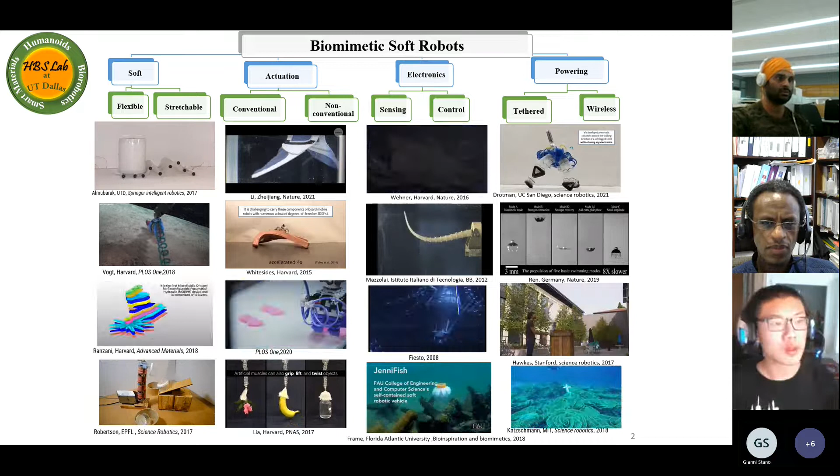So why do we do research on biomimetic soft robots? The major fundamental areas of working are basically these robots are soft. They use both conventional and non-conventional actuation. They can be used for sensing and control in various different applications, plus the powering aspect of these robots. So these are the fundamental areas of working of soft robotics.

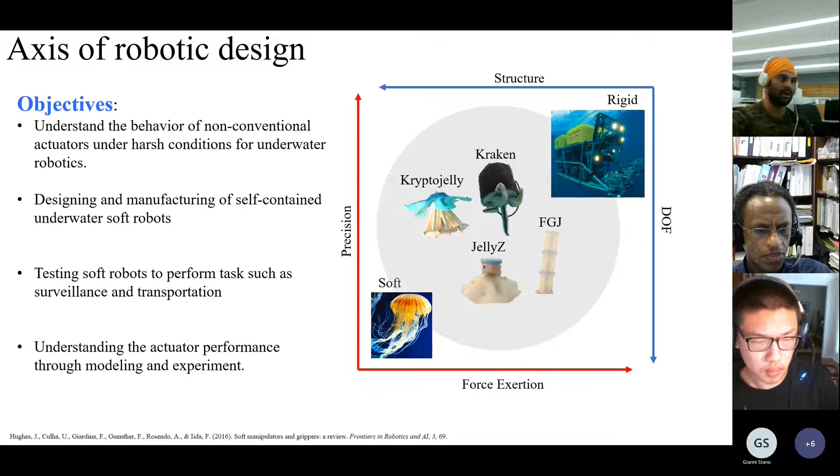Now, what are the major objectives to make a robotic design? Why are we making a soft robot? Basically, we are making a soft robot to understand the behavior of non-conventional actuators under various conditions in water. We are designing and manufacturing self-contained underwater soft robots. We are testing these soft robots to perform different tasks such as surveillance and transportation, and we are also trying to understand the different non-conventional muscles, the actuators, by doing modeling and experimental tests.

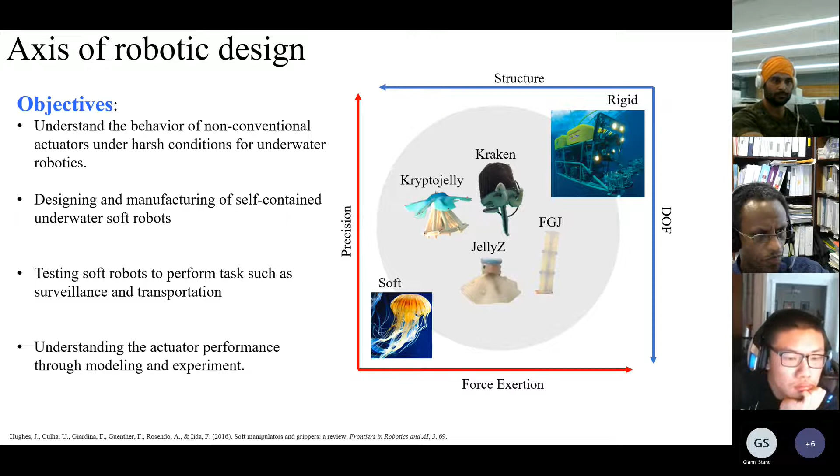The major areas of work that I have been doing over the past year are shown in this slide. So in the underwater soft robotics domain, the first robot I'm working on was the 3D printed Jellyfish Robot. This was a project sponsored by the ONR. The ultimate goal of this was to make controllable geometry of an underwater soft robot, basically to make it manufacturable and to utilize a swarm of these robots.

Number two was the battery powered jellyfish. There is a problem in underwater soft robots in that most of them use wires to get power, or different methods, but none can say that they can be powered on their own wirelessly. This is the purpose of using the battery powered Jellyfish, where I'm trying to use the wireless communication system plus the artificial muscles to actuate the robot with the battery inside the robot. Number three is the hydrogen powered Jellyfish, which is a pneumatically actuated Jellyfish to make it cheaper.

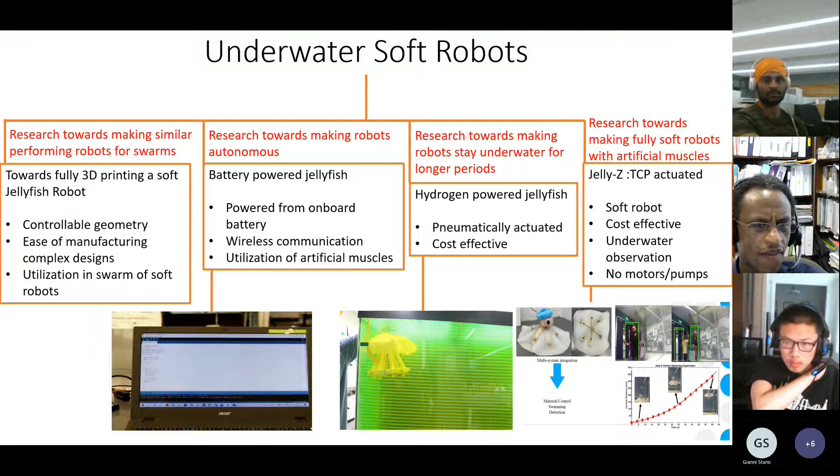Now, why do we use the artificial muscles? The artificial muscles are used in response to changes in the environment. They are used to control. We can control the level of stroke of these muscles by changing the length of the fiber, by treatment in the atmosphere where we provide heat, and we also change the frequency of the actuation. We can also control the number of plies to actually increase the amount of load that these muscles can take.

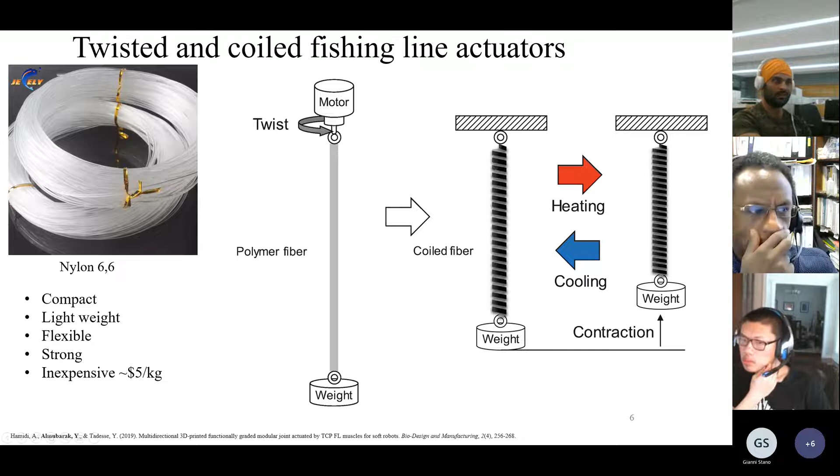Moving on, we are working on some fishing line muscles. These are both self-coiled and mandrel coiled. Right now we are working on mandrel coil muscles, which we are using in the soft robotic skin, and we are seeing the performance of these muscles is comparable with the shape memory alloy coils. These are compact, lightweight, flexible, and strong.

Here in this slide, I'm showing the fabrication process of these muscles. Step one is twisting. Number two is putting nichrome. Number three is coiling. On the right hand side, you can see different photographs of these muscles when loaded and not loaded.

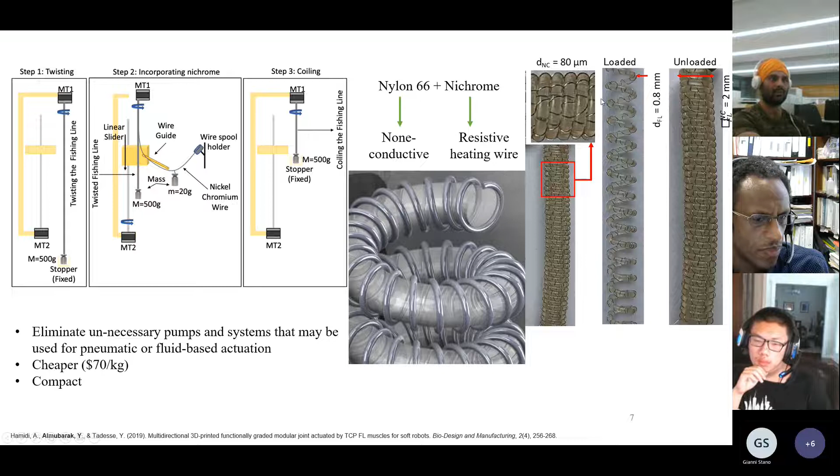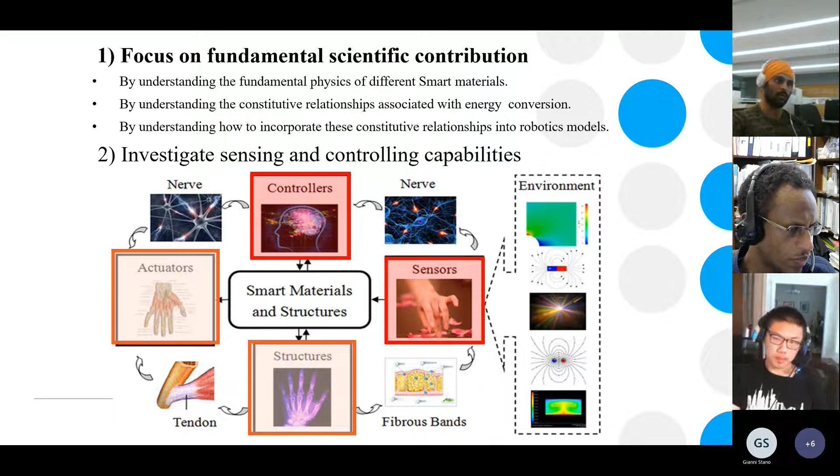The focus of the fundamental scientific contribution is understanding the fundamental physics of smart materials, understanding the constitutive relationships, and how to incorporate these constitutive relationships into the robotics model. My major area of work in my PhD is to investigate all these aspects and to make a totally sensing and totally controllable underwater soft robot with soft artificial muscles.

What is my ultimate goal? My ultimate goal is to make an autonomous smart robot that can go underwater, which is soft, and which can explore various depths inside oceans and seas. As we all know, oceans and seas are not being totally explored, so these soft robots will help in future to go deeper down the oceans and explore various things.

So far this is my second year of PhD. These are the papers which have been accepted, submitted, and which I'm currently working on. That's all from my side. Thank you, and I would like to thank Dr. Ray Baughman, Dr. Jack Costello, Dr. Yonas, who is my guide and PhD supervisor, and Dr. Sean Collins. Thank you.

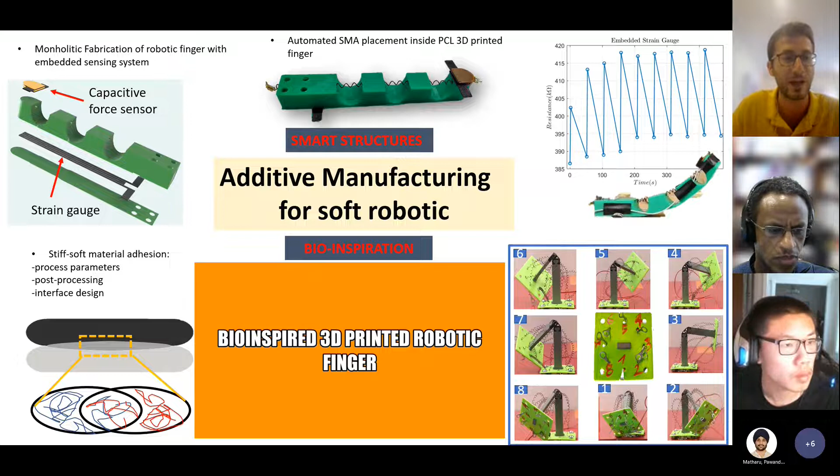Another pillar of soft robotics is bio-inspiration. Just take a look at our body - we have stiff materials like bones connected to each other by soft matter, like cartilage. So we use the same manufacturing technology, FDM, to create this kind of bio-inspired structure by extruding a very stiff material and an extremely soft material at the same time. This is a very new and challenging topic that can potentially push the role of additive manufacturing a lot in the soft robotic field.

We studied how process parameters, post-processing, and design interface can give us benefits for the stiff-soft material adhesion, and we came up with the optimal configuration. We also fabricated a couple of bio-inspired structures.

Now I'm playing the video. It's gonna start soon, I hope.

Yes, this is one of the bio-inspired structures we fabricated. It's a finger, and the gray part is a very stiff material, while the black joint is made of an extremely soft material, with the shape memory alloy inside. Now you can see when we activate the shape memory alloy, we get a very fast response of the finger. If you try to bend your finger right now, you'll see you get almost the same bending that we got using the 3D printed finger.

We also 3D printed another structure that we call the 3D printed bender. It's literally a structure with a soft joint and eight shape memory alloys surrounding the structure. As a function of which shape memory alloy we activated, we got different bending motions.

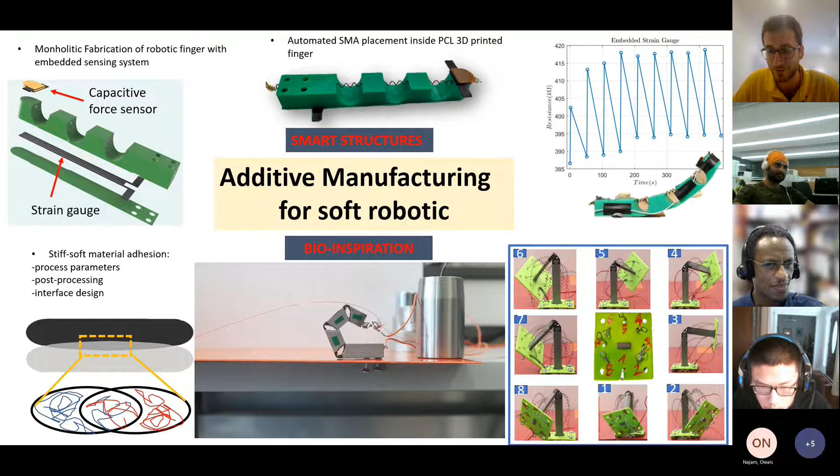So Gianni, I have a question - what's your future research area? Once you have the experience now of doing work in the lab, what's your future research goal? It's a good question - I'm going to finish my PhD in November, so I think I'll mostly focus on writing my PhD thesis right now. When I get back to Italy, I'll focus on that. But I'd like to keep working on this kind of stuff - additive manufacturing of sensors, embedding actuators and actuation systems inside soft structures. So yeah.

Nice man, thank you. All the best to you. Thank you, Wandi. Thank you.

So Gianni, while the slides are here - I think the problem of manufacturing sensors, actuators, the passive structure, wiring, everything is very complex. So to make a smart structure, including in the future controllers and circuit diagrams, everything is a big area of challenge for everyone, and there's no perfect solution so far. The capacitive sensor on the left, you also have the strain gauge for the flex sensor, the touch, and the entire passive structure.

So now my question is, how small, using the additive manufacturing with the FFF, how small can we make this? This kind of printing, this is a good potential question.

Yeah, this is a good question. I think if you want to have good feedback from the sensors, for example a strain gauge, it's not supposed to be less than maybe 3 centimeters in length just because it's fabricated with additive manufacturing. Yeah, the scalability is a little bit of a problem for FDM, for FFF fabrication, especially when you want to fabricate very small structures.

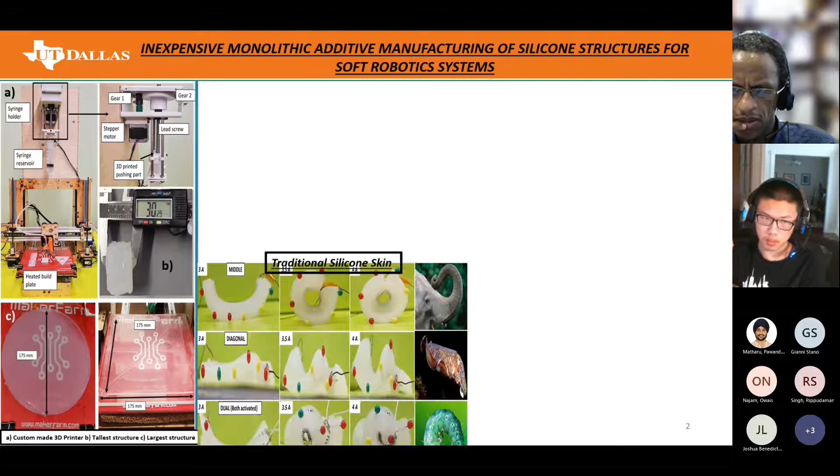Finally, the proposed custom-made 3D printer was used to manufacture multiple types of silicone skin with embedded shape memory alloy actuator. This work has been done in a single manufacturing step, autonomously, without any kind of human direct intervention, using a pick and place robot to embed the SMA. Two types of silicon skin have been manufactured: one is traditional silicon skin, which doesn't have any pattern, and three types of patterned silicon skin have been printed - one with SMA in the middle, one with SMA in the diagonal, another with SMA dually placed.

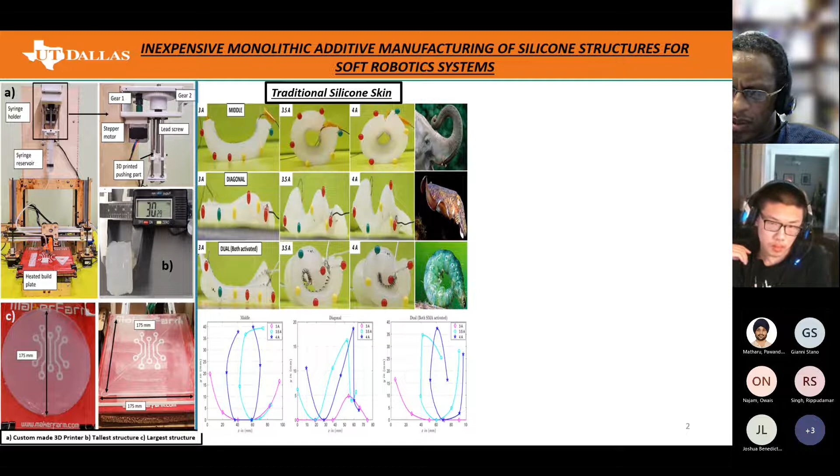This silicone skin, after embedding is done, is characterized using power supply, and at the time they are tested at different current inputs. This skin demonstrates complex motion that recalls the behavior of several animals, including an elephant trunk, a cuttlefish, and a caterpillar. These are the MATLAB plots of this skin movement.

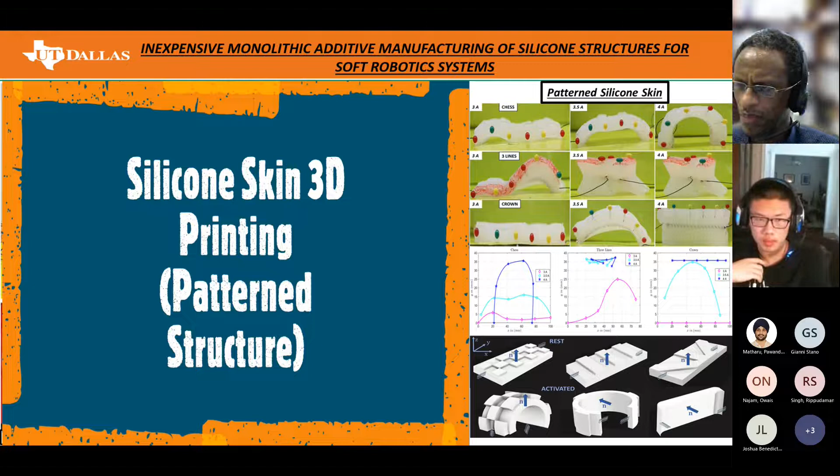And now I am going to talk about another type of silicone skin which has been manufactured and patterned. This is patterned silicon skin - three types of patterned silicon skin have been printed here: one is chess, another is three line, another is crown. Different structures show different kinds of motion as shown in the figure.

These are the MATLAB plots of the silicon skin movement, which has been done using the tracker software. The patterned structure demonstrated unique behavior, and the most important significant thing here is they show out of plane deformation.

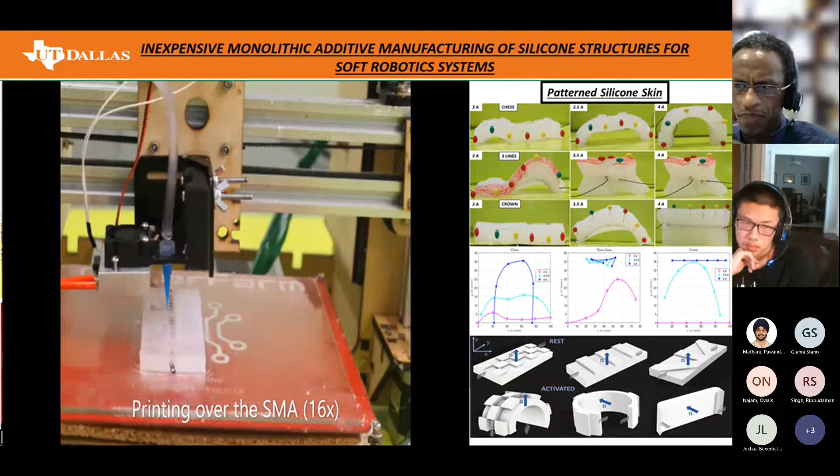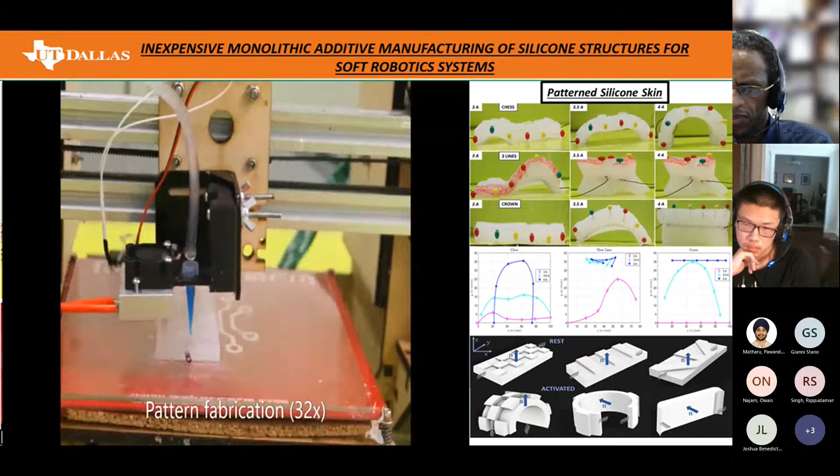The achieved results demonstrate how soft robotics can benefit from silicone-based material extrusion, combined with a pick and place robot. Numerous interesting applications are possible with the proposed 3D printed artificial skin, including soft grippers, walking robots, a soft robot carrying objects, and jumping robots. This video shows the manufacturing process of the silicone skin printing, and here we show the out of plane deformation of some of the silicone skin.

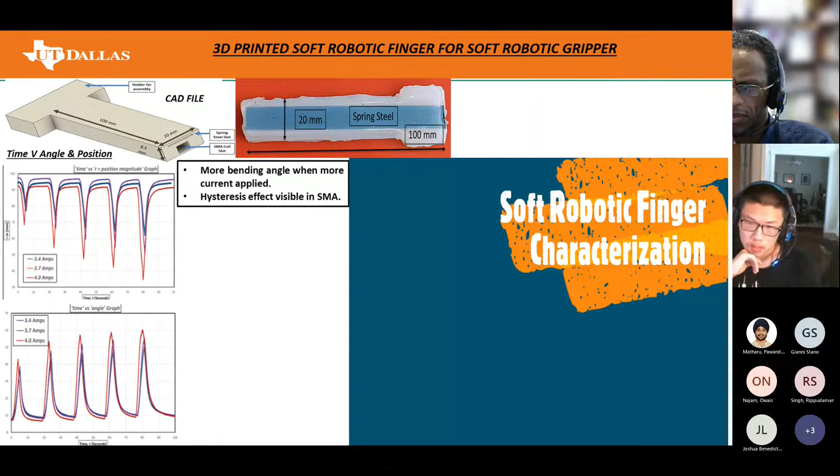Now I am going to talk about 3D printed soft robotic finger for soft robotic gripper. This is the CAD file for the soft robotic finger, which includes the holder for gripper assembly, slot for SMA spring as actuator, and also slot for spring steel to give the finger enough solidity so that after actuation it comes back to its initial shape. Here is a picture of the actual 3D printed soft robotic finger with embedded actuator and spring steel.

After printing several fingers, this is characterized using the power supply with different current outputs. Current used in this research ranged from 3.4 ampere to 4 ampere. Current applied for 3 seconds, then there is a 15-second gap for the finger to go back to initial shape. The study has been done for 5 cycles, which you can see in the video.

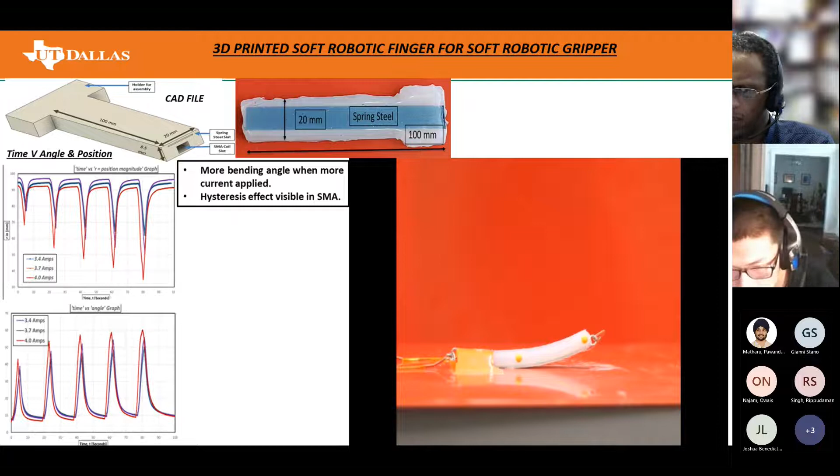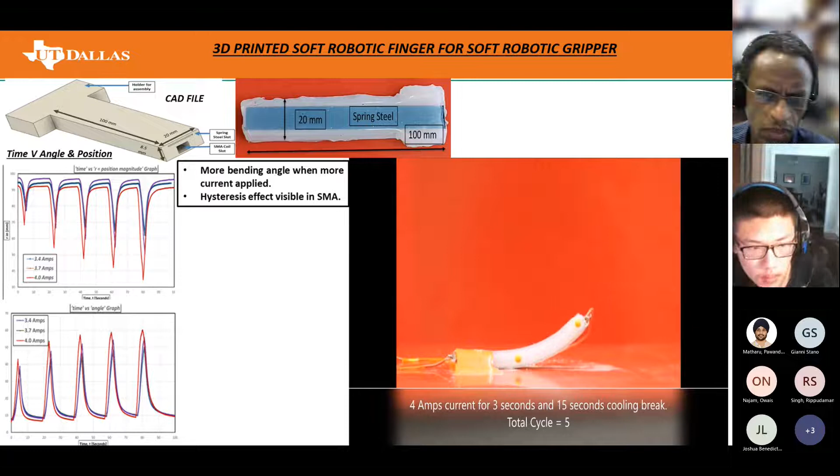It has been found that when the current is higher, the bending angle is more. At 4 ampere, it reaches 60 degrees, and at 3.4 ampere, it reaches 50-degree bending angle. Hysteresis effect is also visible in these fingers. This video shows the characterization process.

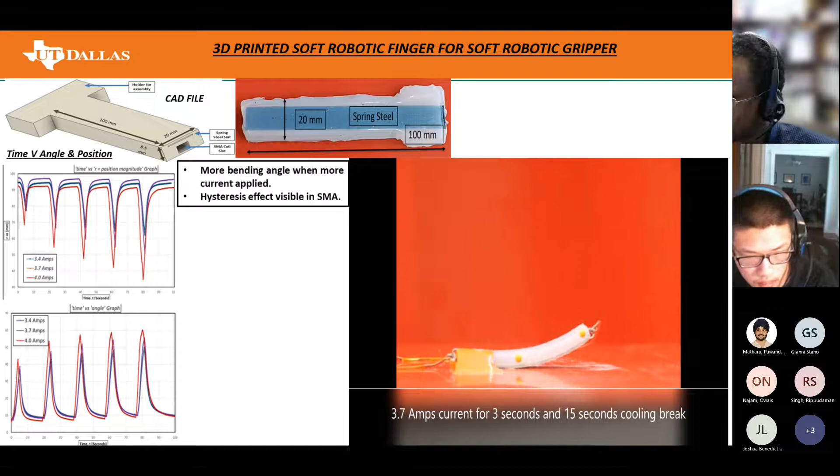It has been found that the bending angle is far superior for the human-like finger. For the human-like finger, the bending angle is 92 degrees, which is 35 degrees more than the finger without joint, which is very significant. Due to the human-like joint in the finger, we achieved these results. Although this kind of finger is very complex to 3D print and almost impossible to mold, by printing the finger with a joint we can achieve more bending angle and more stiffness, which is more suitable for a soft robotic gripper to hold heavy, bigger, and complicated objects.

Thank you everyone. Gianni assisted me in these projects, and I have also worked with Gianni on FDM printing projects, and Gianni will present about that interesting work.

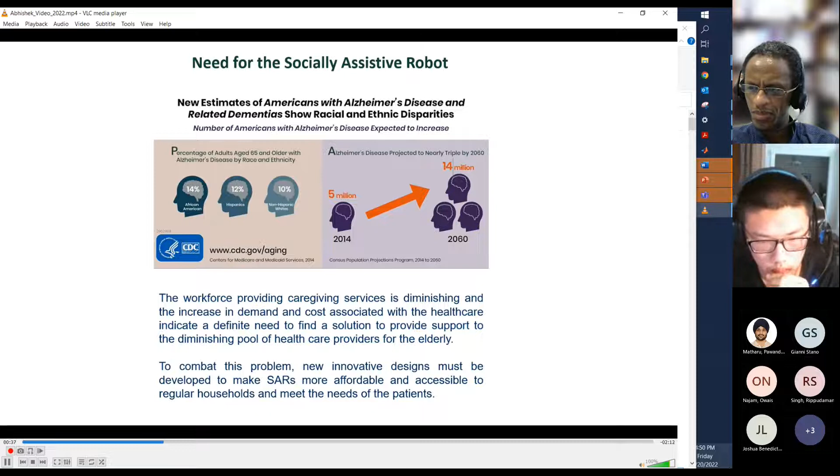According to CDC data, the number of people suffering from Alzheimer's disease will nearly triple by 2060. So developing socially assistive robots for this purpose is really active, and that's where my focus is right now.

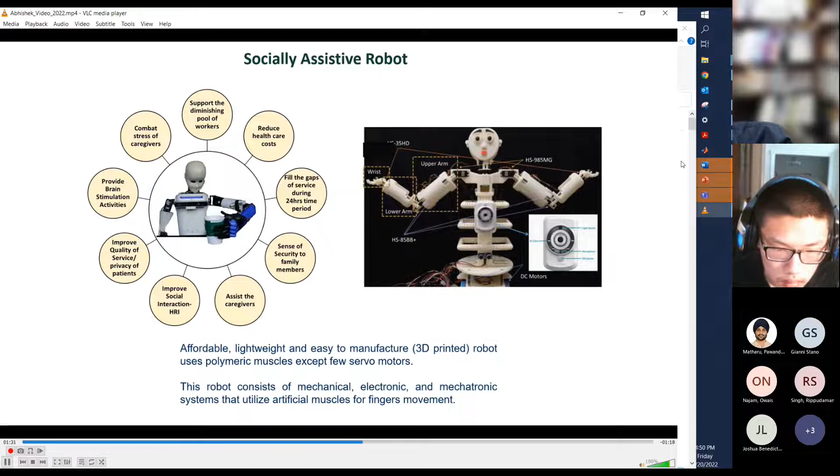For finger actuation, TCP actuators and SMA actuators are some examples of artificial muscles. They don't take too much space, and the operating mechanism is also simple because they are less bulky and easy to operate. Many different kinds of complex motions can be achieved from the fingers with the help of these artificial muscles.

The goal of this project is to eventually support cognitive functions and provide emotional support to patients, as well as enhance security and safety by detecting falls and alerting authorities and family members in emergencies, with improved interaction and friendly appearance. All of this can be achieved with the help of Internet of Things, integrating different devices, incorporation of artificial intelligence, and installing a mobile base to provide more autonomous capabilities to the humanoid robot and increase its functionalities. That's all for my presentation.

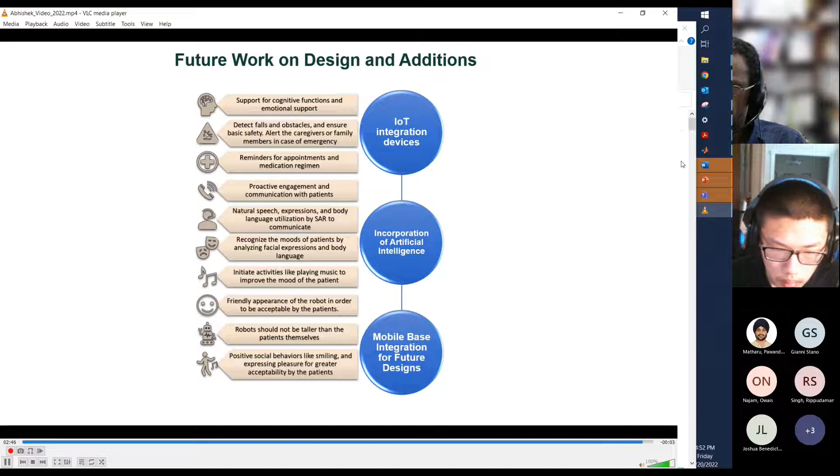Hello, I'm Shubhankar Kasle. I'm a master's student at the Engineering Department at UD. I'm currently working under Dr. Yonas Tadesse on the Fludo-jelly project.

So to start with, what is Fludo-jelly? As the name suggests, it's a biomimicry of a jellyfish. Similar to the working of a jellyfish, which jets out water by movement of its legs to achieve motion, the Fludo-jelly uses the same principle of jetting out water using the movement of its legs to create motion. The Fludo-jelly is a soft actuator robot which is pneumatically actuated and controlled using solenoid valves and remote control circuits.

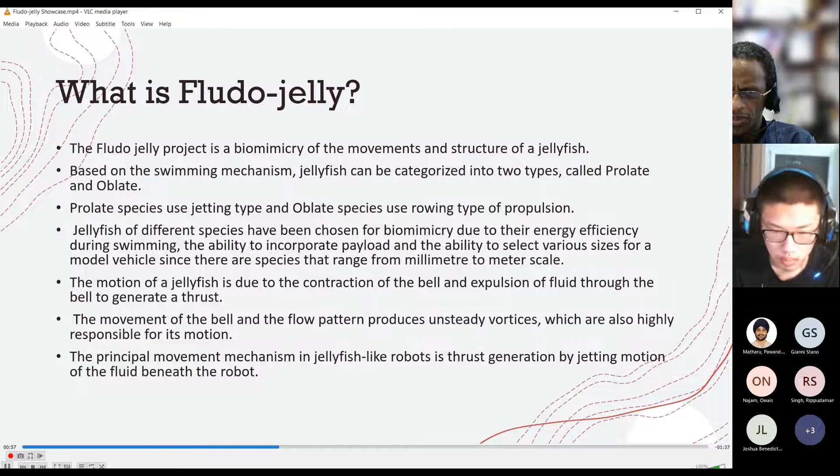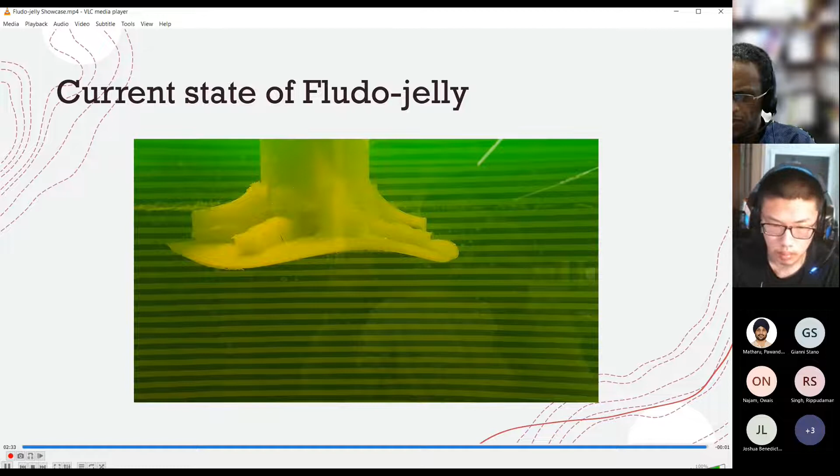The next work on the Fludo-jelly is stabilizing the robot to maintain controlled directional motion. By this, I mean achieving balance between the buoyancy and the weight of the robot while maintaining its motion. Thank you.

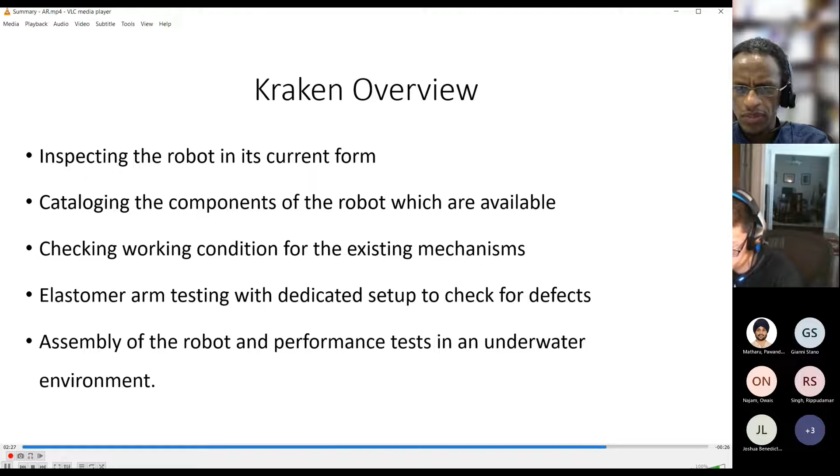So the next step is to assemble the robot with the existing available parts, to check the robot's performance in a submerged or underwater environment. Once that's finished, the next step would be to switch the actuation mechanism of each arm from cables to full SMA actuation. The majority of the work for this robot will be done over the summer.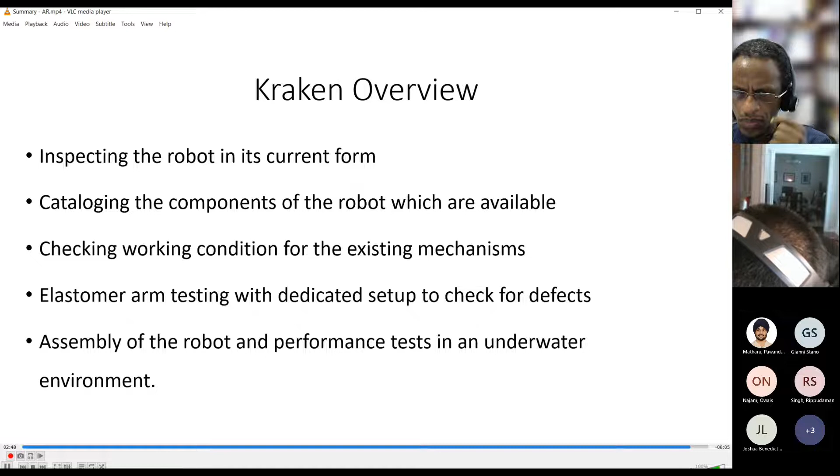Okay, so Arun Chalan's work is basically on the Kraken robots, the underwater octopus-like robot, working with Pawandeep. Let's give hands for Arun Chalan. So who's next, Pawandeep? Next is Ebenezer. He's new, so I think he doesn't have a slide, right? I don't have anything to present, I'm new. I'll present next time. Okay, let's move to the next. Egan. Oh wait, before Egan, let me finish the one I'm sharing since I have Jakob's and Jonathan's slides. Let me put those two together and start from Jakob.

Hey guys, my name is Jakob Edwards, and this is my research recap from the past year. I'm an undergraduate researcher, and I joined in the middle of fall 2021.

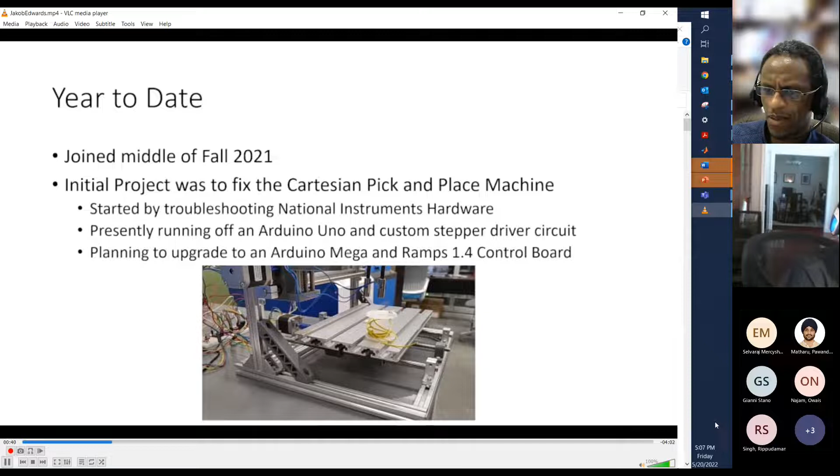My first project was to work on the pick-and-place machine. Although it originally had a lot of National Instruments hardware, which was high-spec, high-torque stepper motors with individual drivers and power supplies, it's currently running off of an Arduino Uno. I had to write a lightweight G-code interpreter and assemble a very customized stepper driver circuit. Right now I'm planning to upgrade that to an Arduino Mega and a RAMPS 1.4 control board pulled off of one of the disused 3D printers.

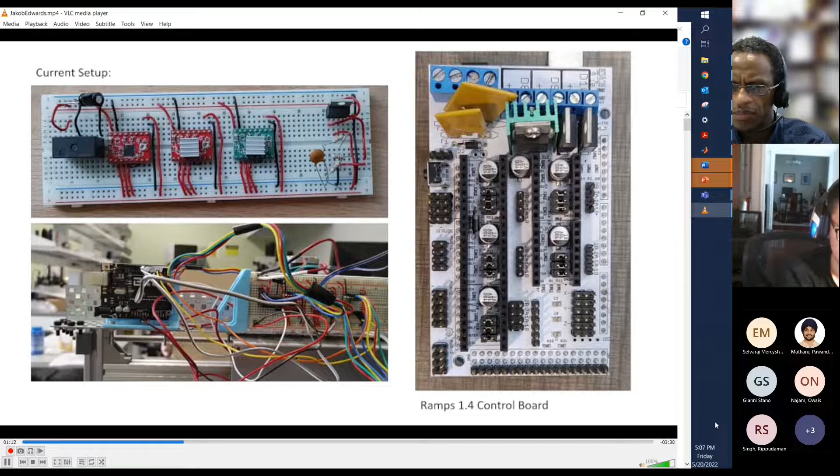So that's what our current setup looks like. The wiring is of course very messy, hard to decipher if you aren't already familiar with the components and how they need to be hooked up. This is the control board. It looks more complicated as far as the items on it, but the wiring itself should be a lot simpler to decipher for anyone coming in, and the schematic for this is already published online, so it's not a big deal to work with.

I also worked on the silicone printer, helping address a lot of issues we were having with it. One major one was the extrusion mechanism -- the syringe pusher was geared down too much, like 100 to 1 when it should have been about 10 to 1. It was extruding far too slowly, so we had to design and implement a pass-through for that. I also proposed improvements in my earlier presentation, including a heated nozzle, a continuous process, and using another printer as the basis of the next machine.

We're still looking at the best control system -- it's going to take a lot of stepper motors to make that work. Before we spend any money on that, we're looking at how to effectively prove the validity of the continuous process, which is pumping the materials in, mixing them, and then extruding them, pretty much all in the same step -- just hit go and have it all work out. So that needs to be validated before we move forward.

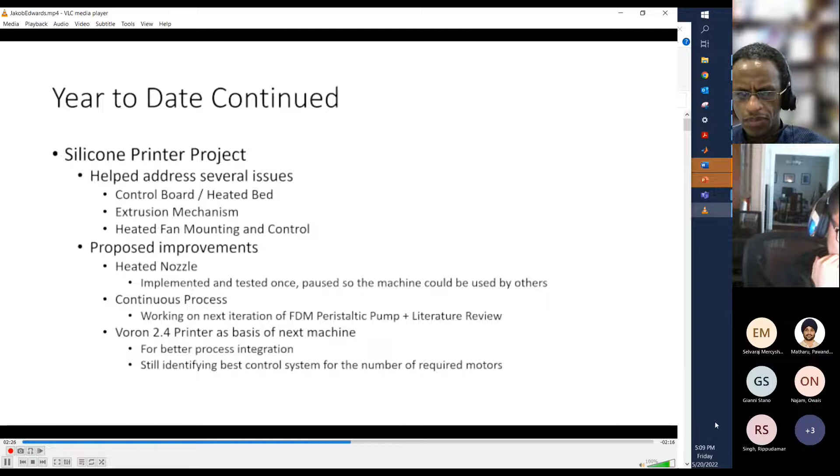Also helped set up the new IDEX printer, that's independent dual extrusion.

I was responsible for setting up the second extruder and the initial leveling, which I've maintained since then. Leveling is a bit of a misnomer—really it's tramming, making sure all the axes in the bed are orthogonal to each other.

I also contributed to the tensile testing and multi-axis bender projects. I modeled the parts for these, Gianni printed them out, and he did pretty much all the testing himself.

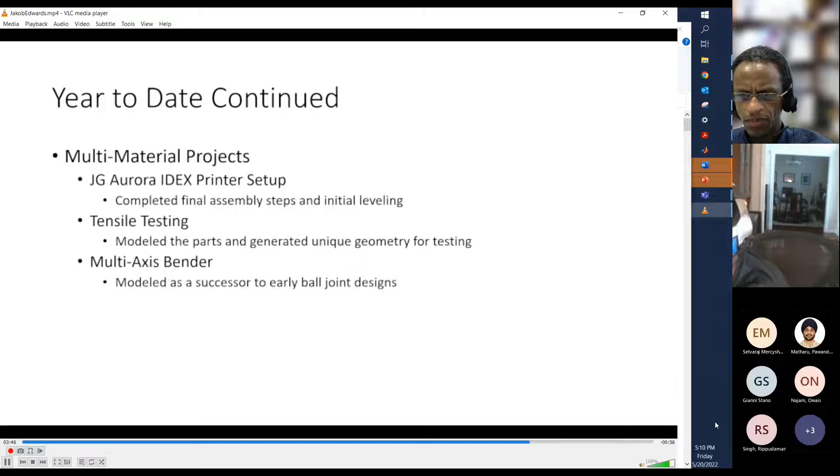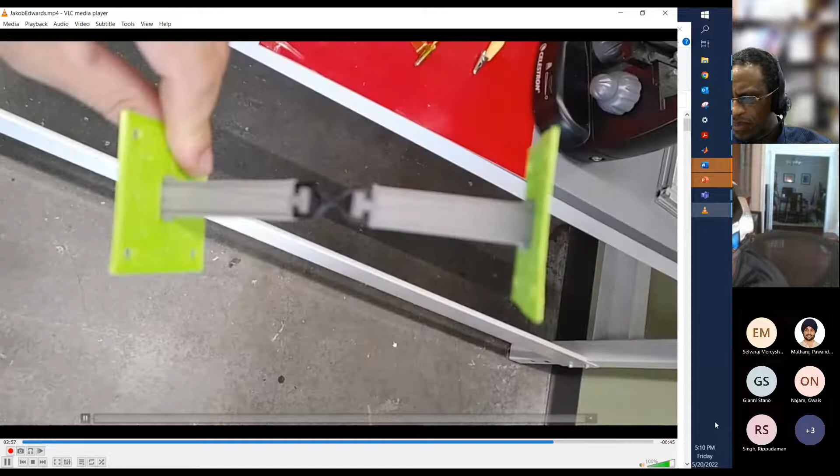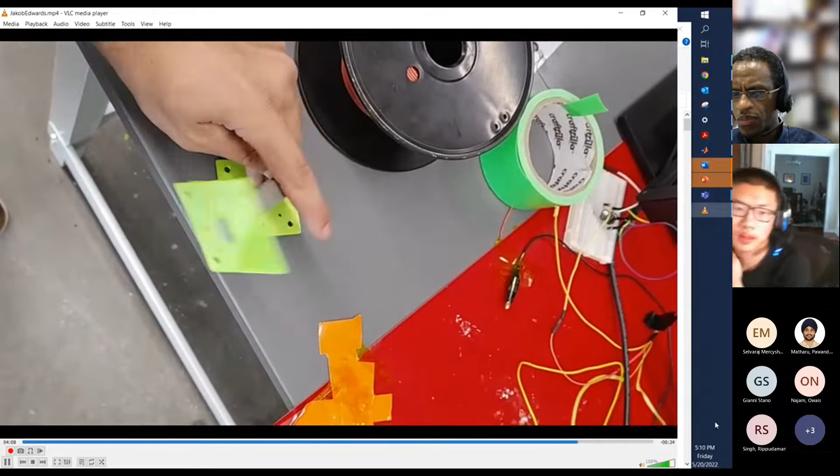Here we have a video of the bender, just kind of whipping it around. Essentially the idea is for it to be flexible in every direction, although this one does have some preference for twisting or tilting to the sides.

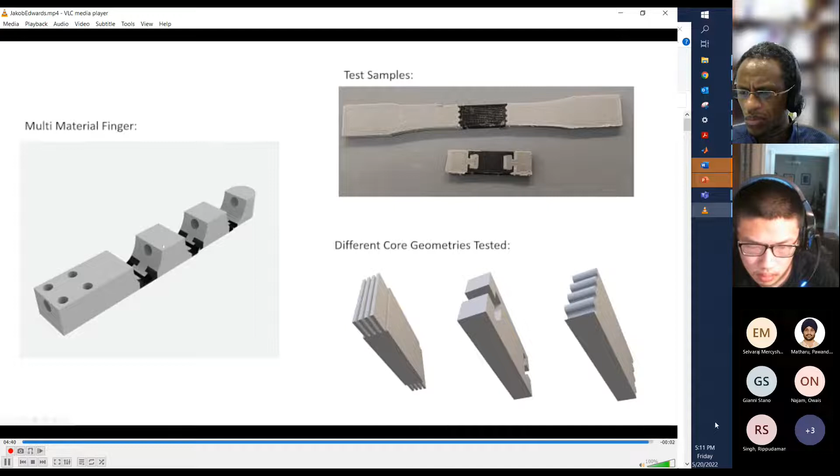Great, I think it looks great, right? Let's give hands for Jakob Edwards. The combination of Jakob, Owais, and Gianni—they solved a lot of problems this year, and I think the result on the additive manufacturing area is significant. So I think that's great.

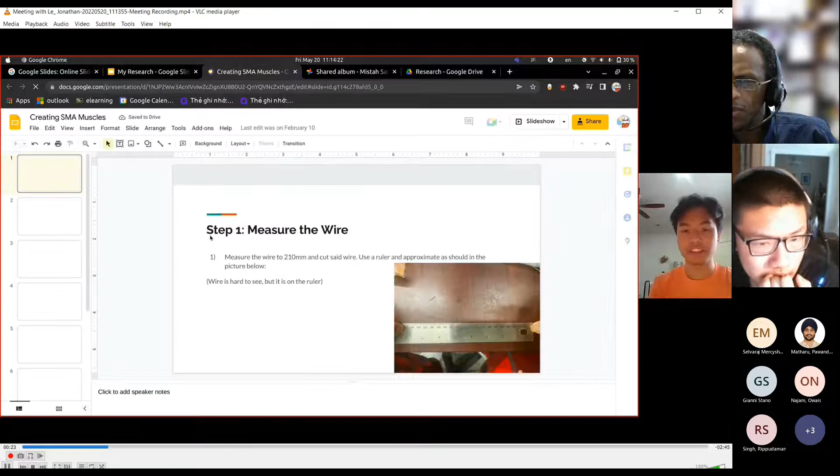I have a whole presentation on how to create SMA muscles, so if you want to learn how, please use this link—I give you steps as well as a video demonstration of how to do it. But what I really want to focus on is the sealing of the Jellyfish Robot.

I was mainly responsible for this part. First, I had the idea to degas the epoxy mixture using a vacuum chamber, because I thought I could treat epoxy like silicone and remove the air bubbles that way. But later I found that only certain epoxy would work with a vacuum chamber, and the epoxy we had would not work with it.

So I had to resort to brush stroking to pop the air bubbles when applying it onto the surface, as shown in the middle pictures. On the right side is the final product of our sealing.

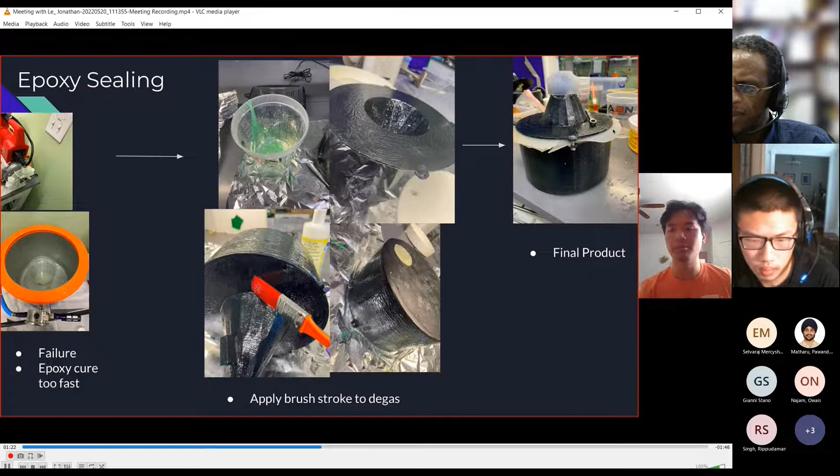But the main issue we had was that water wasn't seeping into the 3D printed structure, but rather into the little gap in the O-ring. So we had to devise another way to seal it.

Another issue was that using a bunch of layered O-rings made it really difficult to rebuild together, because I had to take apart the cap and put back the O-ring each time, which was tedious for finding all the measurements.

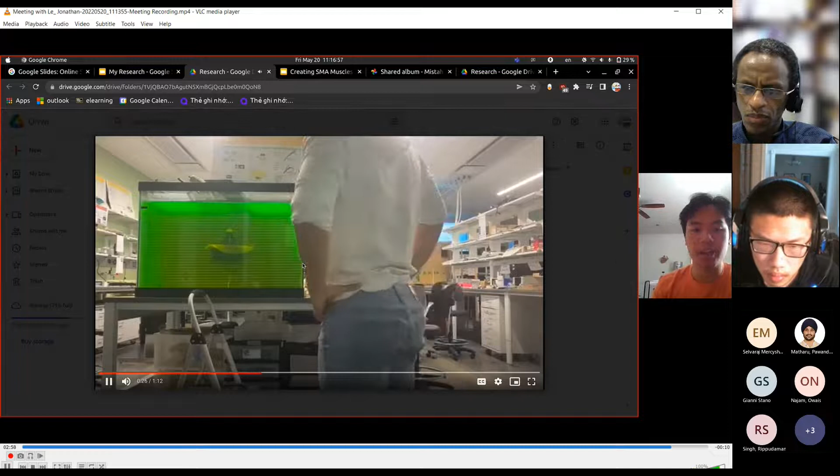We couldn't ever get it to be perfectly buoyant, but as you can see, it's very close. If you add a new stick to that, it would be completely buoyant. And that's what I did for HBS. Thank you for watching.

Thanks, Jonathan. So the sealing problem has been solved, right, Pawandeep?

The sealing problem has been solved, and my goal is to complete the experiments for the battery powered jellyfish, the swimming experiments, within the next week or so.

Yeah, the sealing is one of the challenges in underwater, all this electronics and stuff. So what we found out was that...

Whenever we 3D print with the ABS material, in order to make it fully sealed, it is always better to paint it with a coating - acetone, or the epoxy. XTC, that's the one, right? Right, right, XTC.

So once we do that, the surface is completely sealed basically. And if we have two parts joined and don't want water to seep in through that hole, what we did was cast silicone layers. So with the help of two layers, it basically acts as a very good O-ring, and that seals very well.

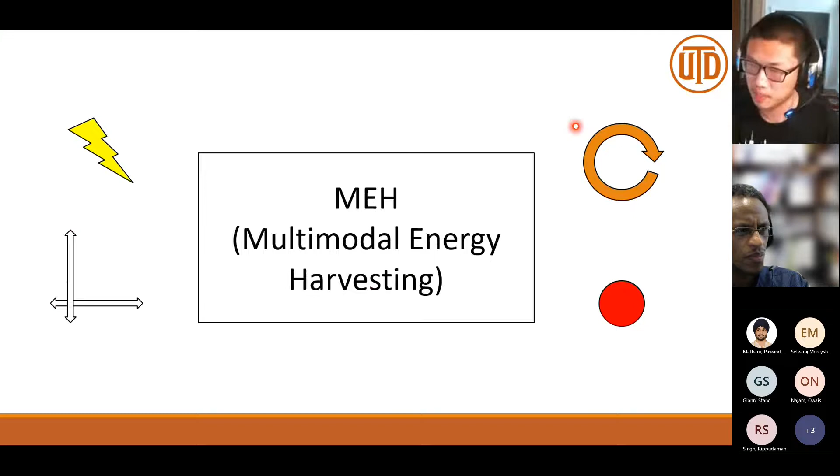There won't always be mains electricity out in the middle of nowhere where you want to have sensors for gathering data. So you can use energy harvesting in order to generate the energy when you need it, allowing for more sustainable designs that could be left alone for longer periods without needing their batteries to be recharged, and without as much maintenance required for their power.

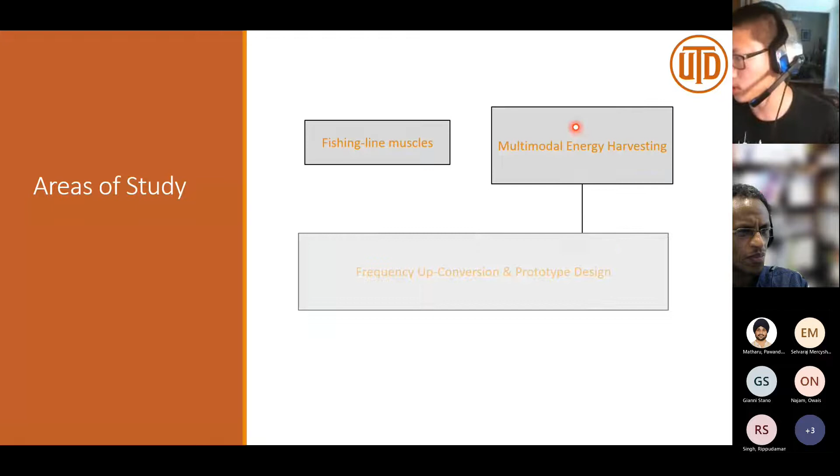So the areas of study I've done haven't just been in multimodal energy harvesting. I first started with a little bit of research on fishing line muscles before moving into multimodal energy harvesting, which then moved on to frequency up conversion and a prototype design I've made in conjunction with the HBS lab that focuses on converting low frequency linear oscillation into electricity via frequency up conversion.

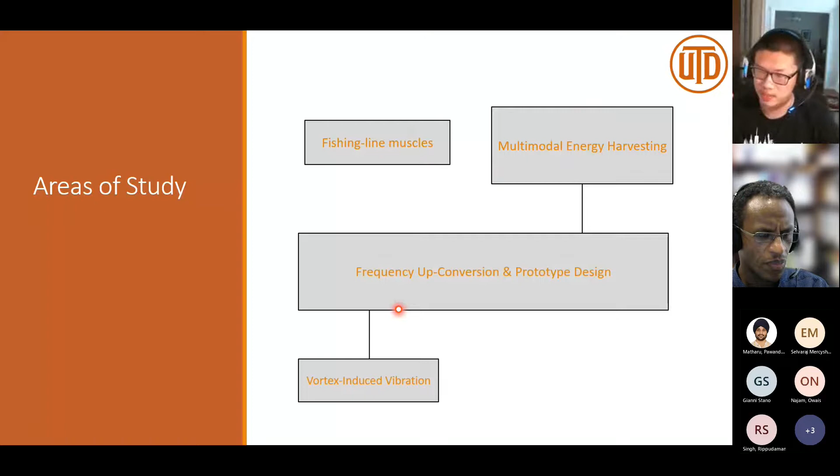Recently, I've also been doing some research into vortex induced vibration in order to potentially collaborate with UT Dallas's HBS Lab's current project about underwater jellyfish robots.

So far, what I've done is: number one, multiple extensive literature reviews about the current body of knowledge relating to multimodal energy harvesting. Number two, I've also attended HBS lab meetings in order to garner more knowledge about the subject and to participate in lab meetings with other group members to help give feedback on their work. And within the context of multimodal energy harvesting, I've done, number one, design ideas.

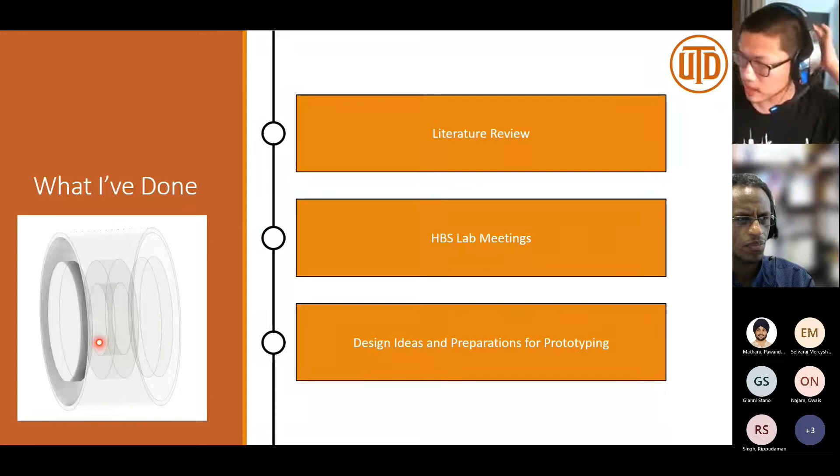Number two, prototyping preparations using things such as CAD models as shown to the left, as well as other preparations for prototyping, such as recognizing the different optimizations and materials that would be needed for this specific up-conversion design that I've done. I've tried to keep it short and sweet, so that's basically all I have for the recap.

Thank you. Great, thanks Egan for the presentation and update. So you've been doing excellent in the multimodal energy harvesting, I think. Well, that's great. Let's give hands for Egan, everyone.

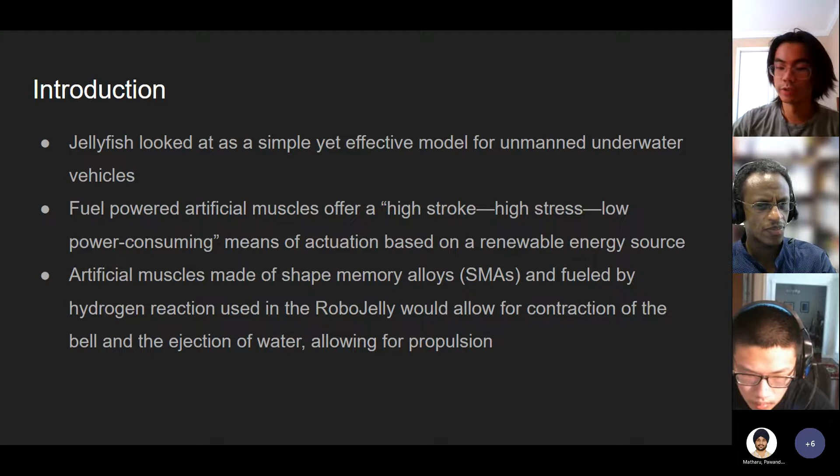So the semester goals and the work that was done were to make another robo jelly using the same actuation methods and to test different things such as sealing. When we made this new model, we did make some design modifications. These included making the bell, or the silicone which made up the bell, less thick. We also had the steel springs bent at a lesser angle, which would allow for better propulsion.

After all this work was done, the Robo Jelly was assembled, and we performed a final sealing test on it. Afterwards, future work should include actually having the platinum catalyst on the SMA wires, so that actuation using the SMA wires can be tested.

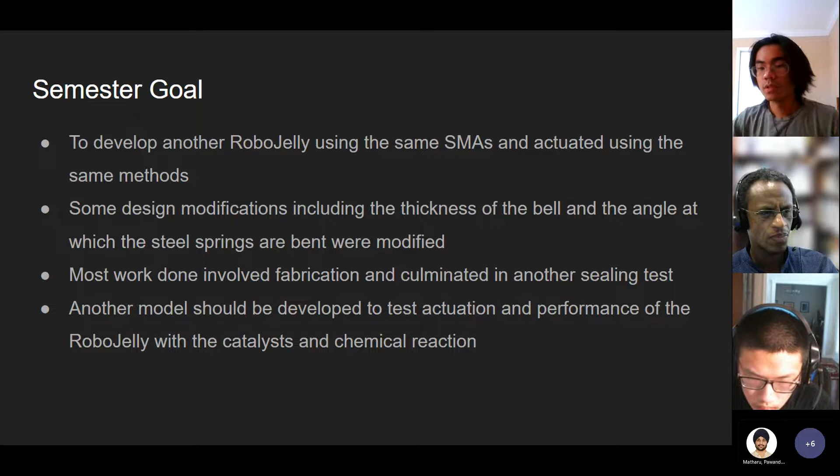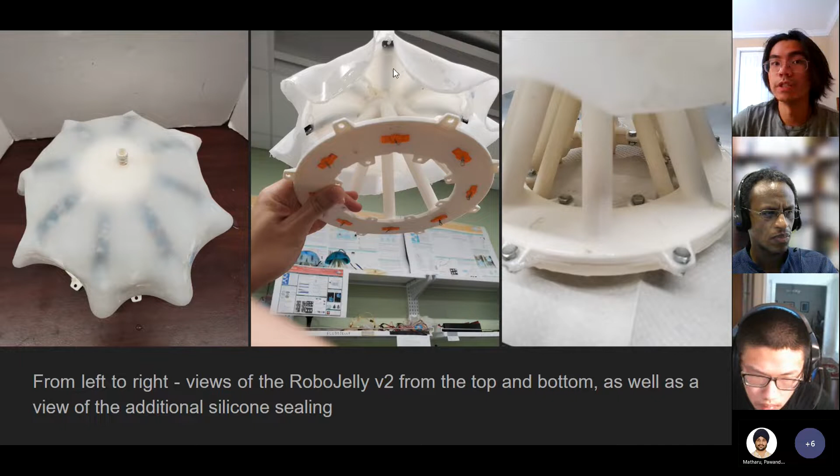So here is the final result of what I worked on over the semester. We can see a top and bottom view of the Robo Jelly, as well as the silicone sealing which was done for the final test. Here we can see the end caps, which are attached to the SMA muscles, as well as this silicone bell with the spring steels embedded inside.

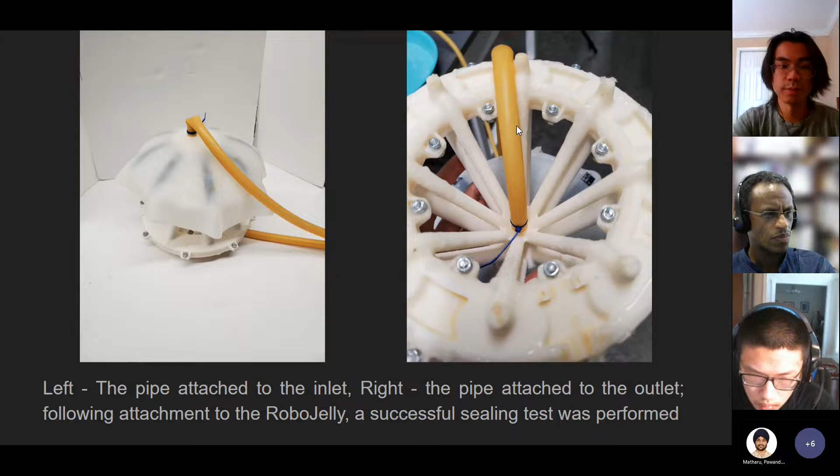Great, all right, let's give hands for Joshua. Good job, Joshua. So this work has been completed, very nice and clean work. So on this prototype, very neat. Yeah, so you just graduated, right, Joshua? Yeah, that's right. So what's the next plan?

So as of now, I will be applying to master's programs at other colleges. Okay, yeah, you've been excellent also in the smart material class, so that's great. Thank you very much for your contribution. Okay, any comments, questions for Joshua?

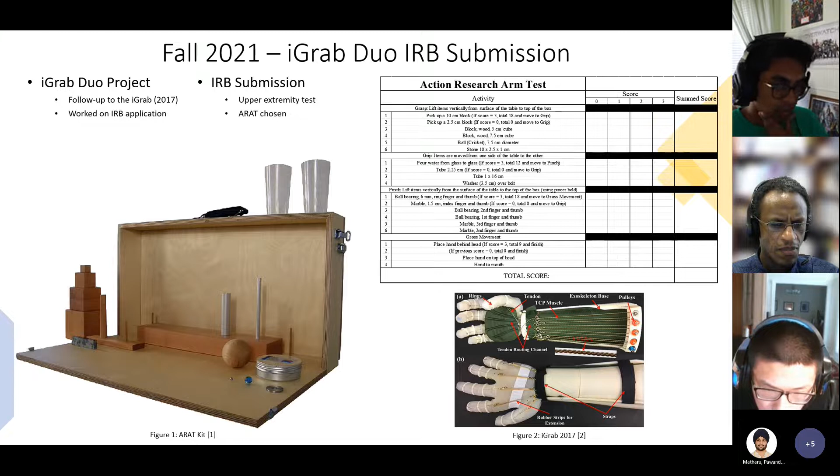But this past spring, I switched projects to work on the TCP muscle comparison project, the goal of which is to compare 2-ply, 4-ply, and 6-ply TCP muscles. We also planned on discussing applications and creating a PID controller to maximize muscle efficiency in terms of temperature, but those last two parts may or may not be included in the paper.

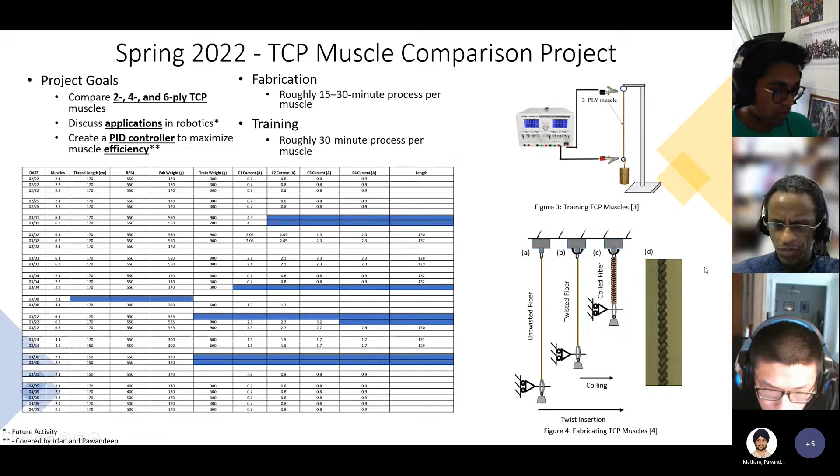For 2-ply muscles, we varied the weights, currents, and time current was applied to each muscle, for a total of 135 trials. We just completed that this past week, and we're hoping to finish writing the paper in the next few weeks for publication. That's all I had.

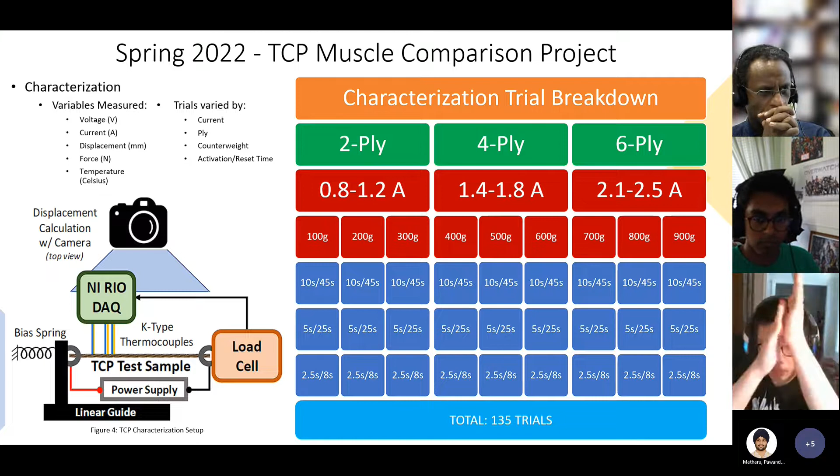Questions from anyone? Okay, let's go to the next one. Arwa is new, so she's not presenting, right? She's just joined. Owais is the last one. Owais, can you guys hear me? Yep. Let me share my screen. Can you guys see the presentation? Yep.

Hi, my name is Owais, and I recently joined the HBS lab. So right now I'm in the process of reviewing the different kinds of artificial hands developed at the HBS lab. Today I'll be presenting the SMA Actuated Hand that was developed recently at the HBS lab a few years ago.

So the design objectives for this hand were that it should have the ability to hold at least 100 grams, and it should cost less than $200 to fabricate. The arm and structure should be less than 300 grams in total weight, because it becomes uncomfortable to wear if you're suffering from a stroke or using it for other purposes. It should also have the ability to manipulate objects of daily use, about 50 to 100 millimeters in size.

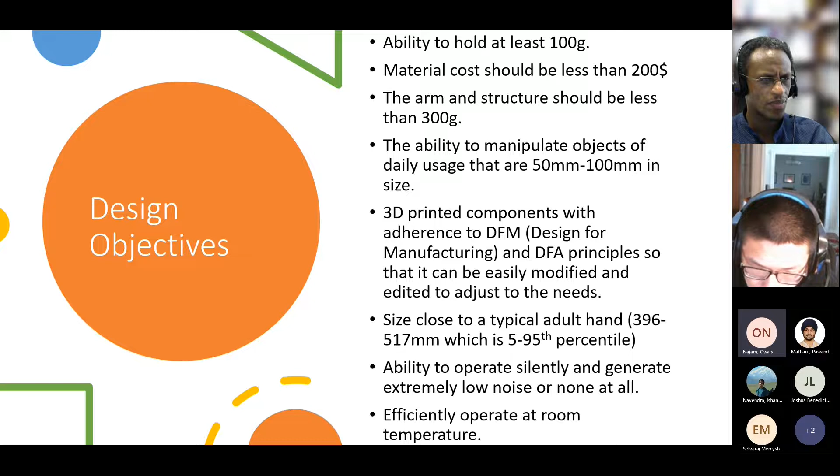It should also be easier to manufacture so others can modify and print it according to their needs. The size should be that of a typical adult hand, it should operate silently, and room temperature should be optimal for its operation.

Some other preliminary considerations were that most artificial hands were extremely expensive, with prices ranging from $6,600 to $100,000. Most existing hands are highly complex because the standard hand uses electric motors, and they use joints to incorporate every degree of freedom into the design. Because of this, they're highly uncomfortable to wear due to their complexity and weight.

Some new promising actuators for hands are SMA, shape memory alloy, and twisted coil polymer, or TCP. This is because they're low weight and have a simple working mechanism — you basically heat them and they contract.

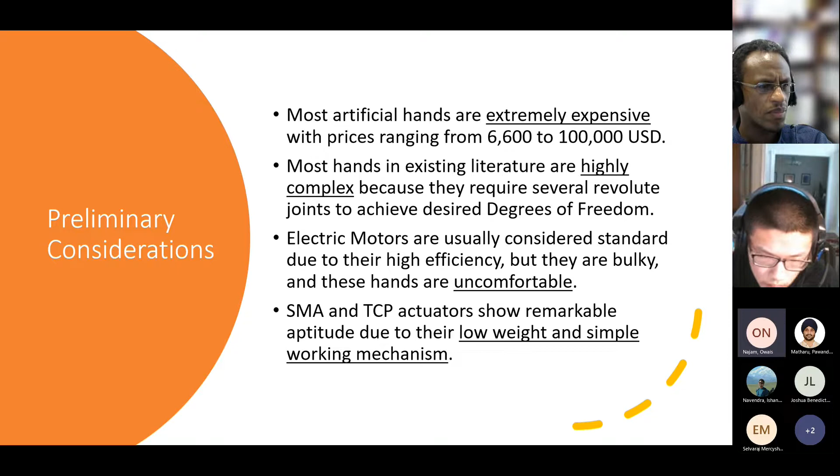The major benefits of using SMA muscles are that they're compact in size, have a high force-to-weight ratio, and operate silently. Some downsides are low energy efficiency, low stroke, and low operational frequency. The frequency can be improved by using an external cooling source, since heated SMAs take time to cool, and using an external source can increase operational efficiency. In terms of stroke, it can be improved by using a helical structure.

So if you use a linear SMA, the 5% stretch stroke of it is lower than if you use a helical structure, because a helical structure will have a higher linear length when it's stretched out. So in this hand, we used a helical coiled SMA to generate higher stroke, compared to TCP which has high stroke, but we solved that using a helical structure.

They're inexpensive and have a high force output. However, they have a low frequency and also require high inputs. Another downside is that they have an extremely limited life cycle. An example of this is that they have a predicted life cycle of 800 cycles at 0.25 hertz in water.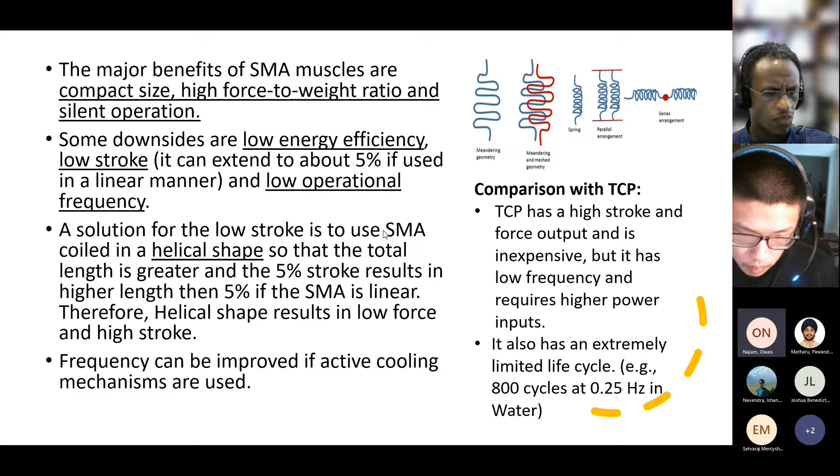The thumb motion is only flexion and extension right now. The other motions aren't incorporated into this design because of their complexity.

This is a comparison of this design, the coiled SMA which is the last one in the table, to other coiled SMAs, SMA plates, and SMA wires. We can see that this one has the lowest weight and the highest degree of freedom to actuator ratio. It uses 8 actuators and we get 14 degrees of freedom. It also has a lot of fingers, which the others don't.

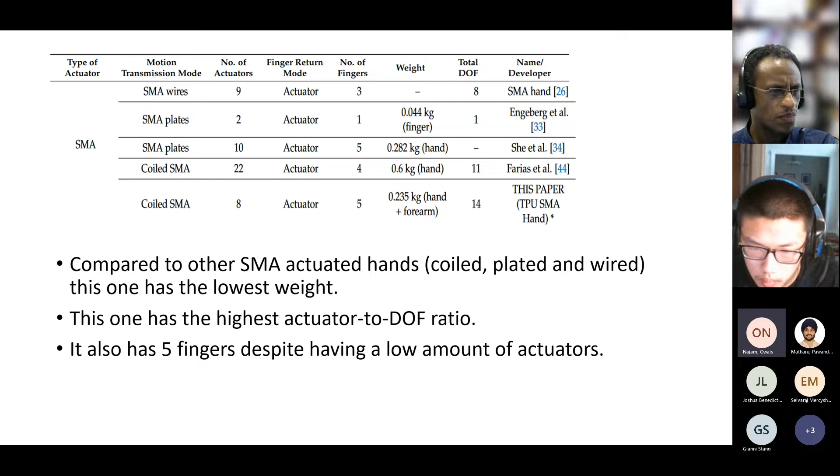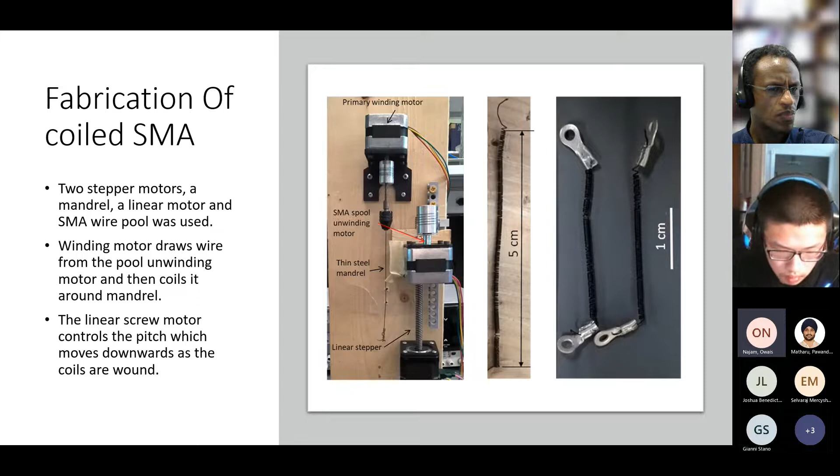For the fabrication, 2 stepper motors, a mandrel, a linear motor, and the SMA wire were used. The winding motor draws wire from the pool unwinding motor and then coils it around the mandrel. The linear screw motor controls the pitch, which moves downwards, and all this happens as the coils are being wound by the winding motor.

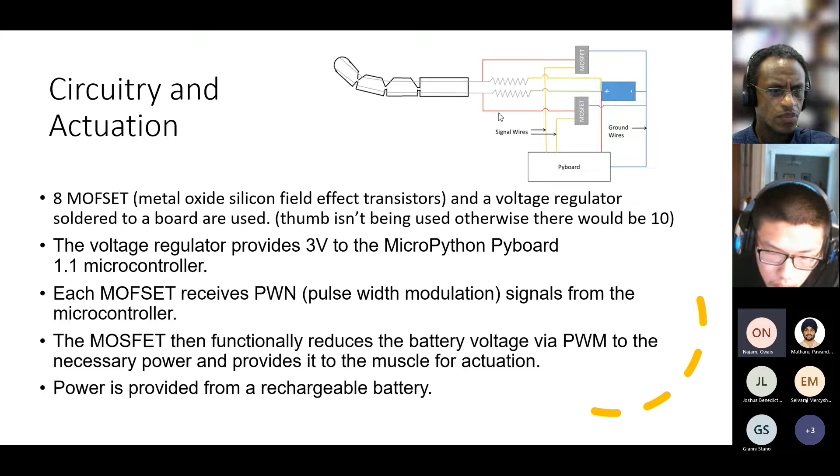In terms of the circuitry and actuation, 8 metal oxide silicon field effect transistors were used, and a regulator that was soldered to a breadboard, and then a MicroPython Pyboard microcontroller. Each transistor receives pulse width modulation signals from the microcontroller, and the transistors functionally reduce the battery voltage via the pulse width modulation to the necessary power, providing it to the muscle for actuation. The power is provided from a rechargeable battery shown in the schematic diagram.

For the experimental setup, we used laser sensors, thermocouples, and set up the SMA, along with a linear guide with a bias spring. The SMA was loaded into a load cell and then connected to the linear guide. The tests conducted were finger bending angle tests, horizontal grasping tests, vertical grasping tests, frequency tests, and cyclic tests.

This is the muscle characterization or bending tests. In the results, the maximum temperature was not reached until the second or third cycle, and the peak temperature was 99 degrees Celsius. But the large variations in temperature didn't create a significant change in force or displacement, since we see consistent force and displacement changes in the diagrams below.

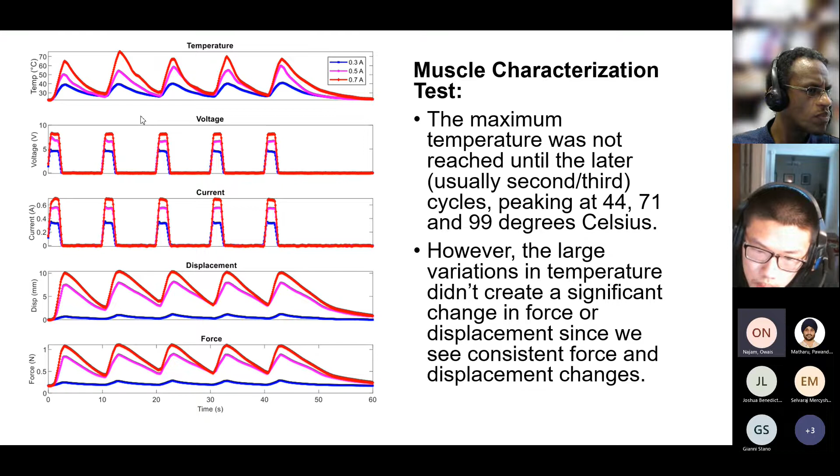This is one of the aberrations that we observed. For the electric current and angle tests, we used 0.5 amperes and 0.3 amperes. We also tried 0.2 amperes, but that input didn't create noticeable actuation. The angular outputs from the MCP, PIP, and DIP joints were consistent for 0.3 and 0.5 ampere currents, though there was a slight aberration in the returning phases of the 0.5 ampere actuation.

On the bottom, there's an example of the physical hand being captured in different phases of the actuation cycle.

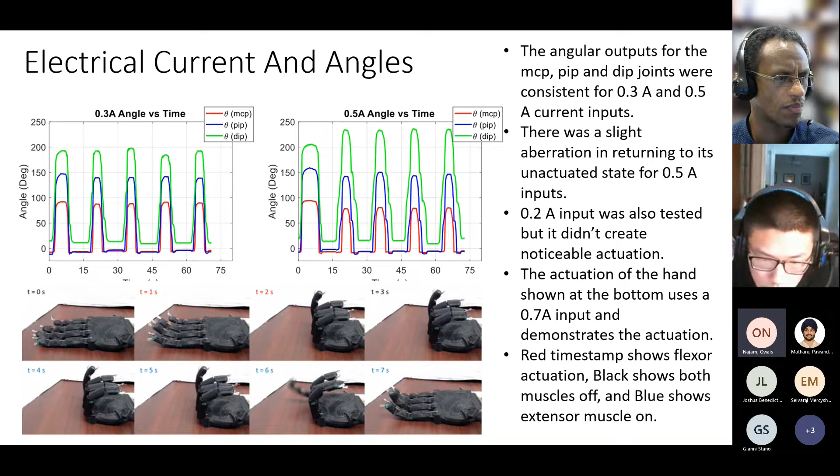The horizontal grasping tests were conducted using a cricket ball, plastic cup, and a box. The heating cycle used was 0.5 amperes inputted to the flexor muscle for 4 seconds, then 0.2 amperes pulsed to the flexor muscle to maintain the grip on the object, followed by a 1 second off period. Then for 7 seconds, 0.5 amperes were applied to the extensor muscle to make the fingers return back to their original state.

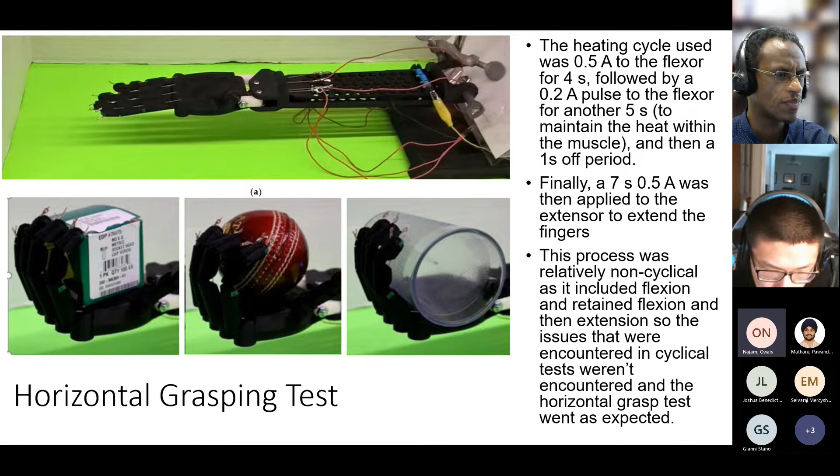So this process was relatively non-cyclical because it included only one grasp and release. So we didn't see the aberrations that we saw in the cyclical current input test shown previously. This was relatively smooth, and resembled a human hand grasping an object horizontally.

As for the vertical grasping tests, an empty cup, a cup with water, and a box that weighed 12.67 grams were used. Same box as last time. The thumb is not used in this, so the gripping is solely generated from the fingers. The thumb provides no support. First we make the hand hold the cup, and then we pour water into it.

We can see when we pour water into it, the cup sinks into the hand because of the increased weight. The current supplied for the vertical grasp test was the same as the horizontal grasp test. Only the duration of the current was increased by 2 seconds for all of the flexor muscles.

Then 2 other tests were performed, the perpendicular loading tests. This was accompanied by a perpendicular loading simulation. A large displacement is seen in the simulation, but this is because we used a cantilever approach, applying a load at one point, which isn't generally the case in hands. So, despite the cantilever arrangement, the displacement wasn't as large as we expected, showing that the finger can sustain high loads without yielding.

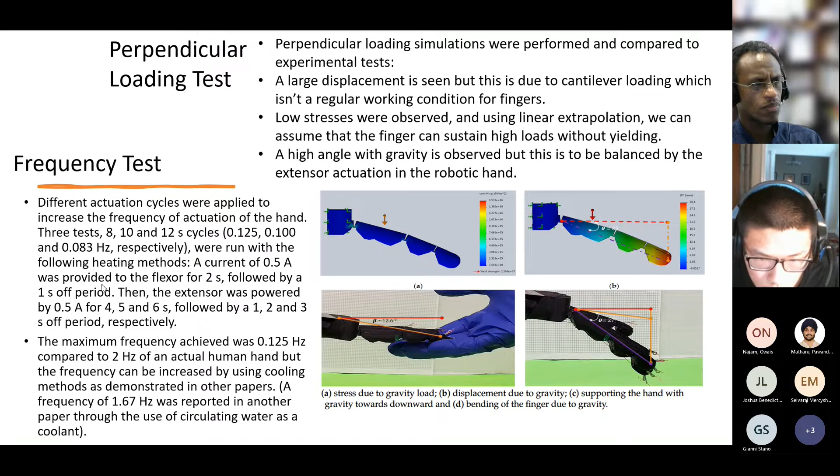And that's all I have for today.

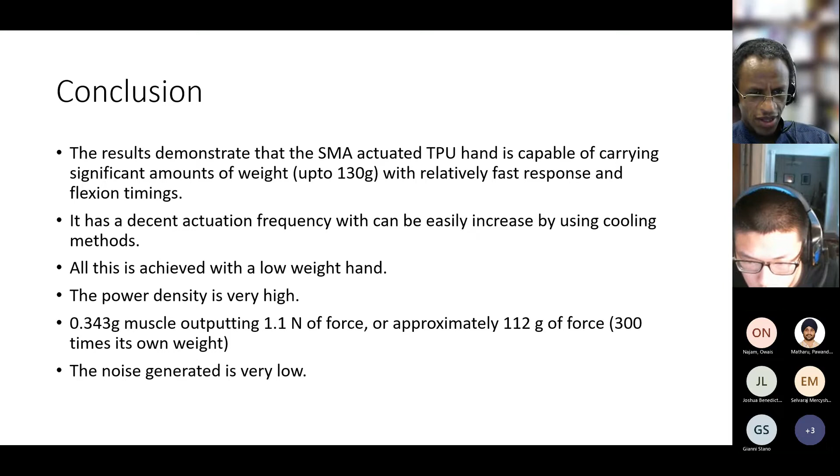Great, thanks, as always. I think this is a good refresher for the TPU hand, right? Okay, let's give hands for Owais Najam. Good job. It took a little more time, but I think it's a good refresher because that work is good to look at from that point.

Okay, I think we are done, right? Yes, yeah, so we are done. I think it was a very good discussion and meeting summary from everyone. Thank you so much all for contributing this. I think we should continue this kind of activity. I just want to say that despite the difficulty we had last year, I think we have significant results.

Personally, I had a very difficult time this year because, as you know, my dad passed away. It was very hard for me. He was a friend, he was also a mentor, he's a father, everything. So research-wise, somehow our research was affected because I was away. But I think you guys did very well, and I'm so happy that we have achieved significant results.

Thank you so much, all of you. Thank you for contributing to HBS Lab and also for your personal career. The next thing is to wind up and summarize all these things in a publication. I will meet you individually. Let's continue collaboration and continue the great work. Okay, thanks everyone, and enjoy.